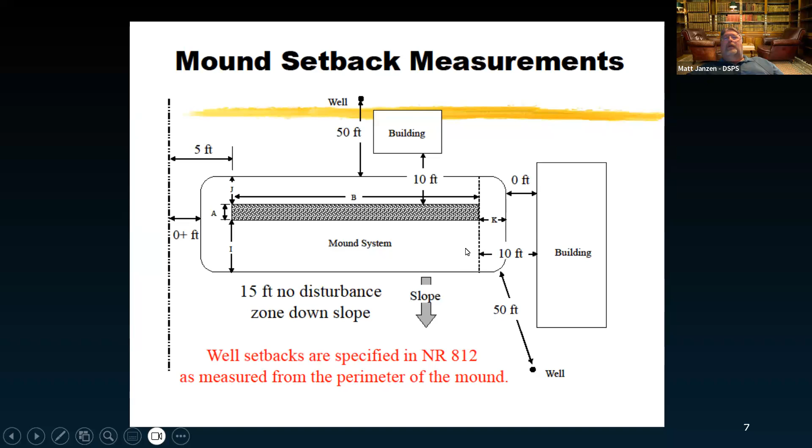The next section I want to talk about is a general plumbing update. You may be asking, well, we're in POWTS, why do we care about general plumbing? Well, we reference 381 through the whole suite of the plumbing code, 381, 382, 384 are the bulk of it. If there's any changes there, they may affect us in the POWTS program, so it's important to understand what's going on. I've gone through and found the ones most likely to affect us, so I think I got them all, but maybe there's something out there I'm not aware of.

A few things I want to point out: restricted service licenses. This is what the old code used to say - restricted service master plumbers and journeymen could do POWTS systems, building sewers, and private interceptor mains. We know we could do the building sewer from the building out to the septic system. Typically general plumbing is everything up to the septic tank, but it allows restricted service people to do that. Also water services, private water mains under 381, and a portion of the drain or water supply that connects building sewer to the connection provided for mobile or manufactured homes. So that's what it previously allowed.

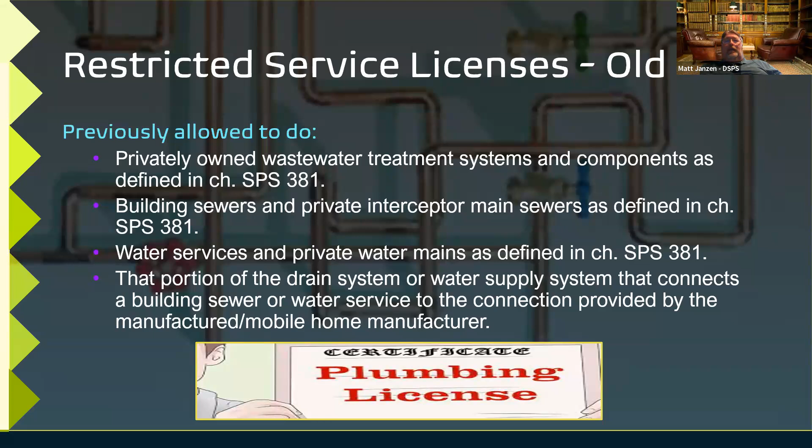There's been some expansion of that. We still have the same privately owned wastewater treatment system components - POWTS, building sewers, sanitary building sewers, and storm building sewers. Now it adds that you can do it from the street main to immediately inside the proposed foundation or wall of the building. So it doesn't have to be a building sewer connected to a POWTS - you could also do any building sewer, including storm. Also water services, private water mains, manufactured home community water supply systems, and campground or recreational park water supply systems. So it's expanded a bit.

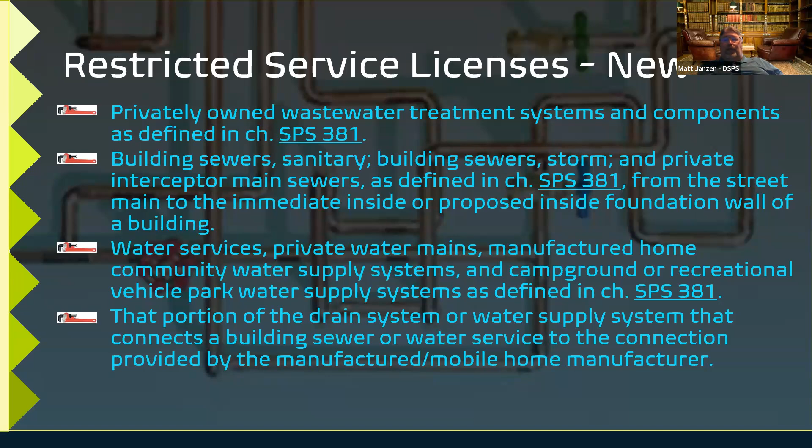Same as before, you can do the portion of drain or water supply systems through a mobile home - that's unchanged. But you can also now do manufactured home or mobile home community drain systems, sanitary drain systems, and storm systems, plus campground and recreational park drain systems or storm systems. So it added storm into a lot of that.

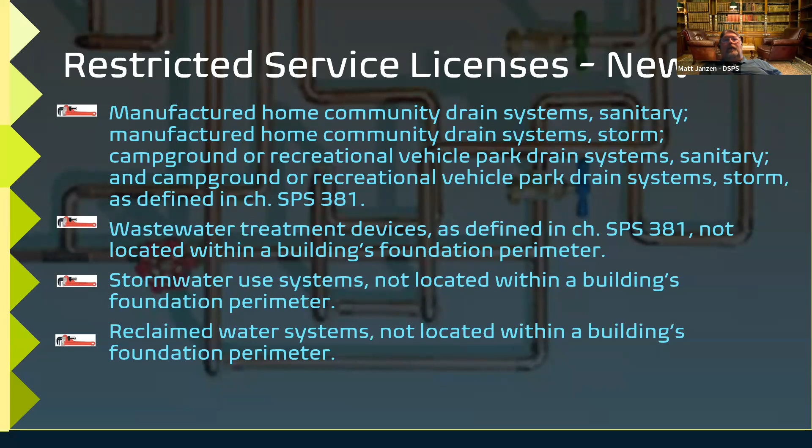It also allows those restricted licenses to do wastewater treatment devices, as long as they're not located within a building's foundation perimeter. So you might have a wastewater treatment device and then it goes back into the building - you'd be able to do those. Also stormwater use systems and reclaimed water systems, if it's something outside a building perimeter. You wouldn't be able to do one inside, but if they pipe it outside, it goes through some kind of reuse, reclaiming, or treatment, and then back into the building, as a restricted license holder you'd be able to do that kind of work.

So just a little bit of a difference there on what the licensing updates allow you to do. Some other plumbing code changes: SPS 382.21, testing of plumbing systems. Except as provided, all new plumbing and all parts of existing systems that have been altered, extended, or repaired shall be tested and inspected as specified. This adds language that it has to be inspected. Previously, a plumber could just test it and say it's good to go. Now it says it has to be inspected, so be aware that if you're doing some of these things, it requires an inspection.

The other thing that's also been extended to the counties is that now with building sewers, it requires them to be inspected.

So we should be noting that if you're looking at that stuff, note that you inspected it, or if you did not, note that you did not inspect these things, because where general plumbing and POWTS take over, we just want to make sure you note what you inspected and what you didn't, because we don't want somebody coming by saying the county was out there and looked at that, and you say no, that was a stormwater or water reuse system, that's not my purview, I did not inspect that part of it. So make sure from the county's end that you're noting what you inspected and what you did not, and from the plumber's end, if the county's not looking at it, make sure you contact UDC or general plumbing and get it inspected, because it's required to be inspected.

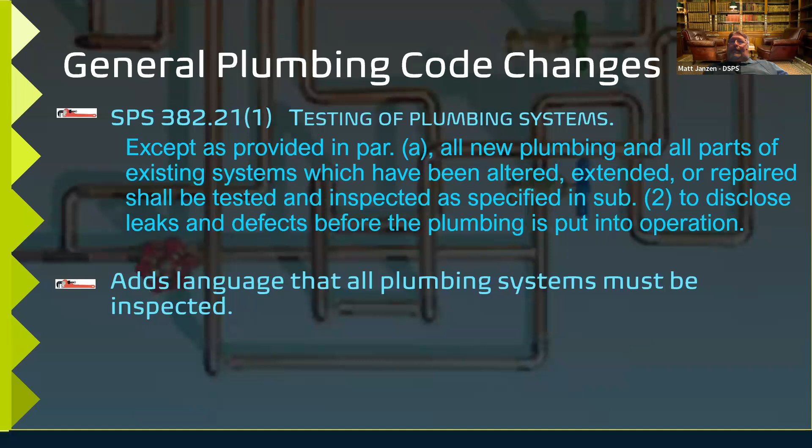So the next section here, SPS 382.34, paragraph 5, paragraph B2, private on-site wastewater systems. It says all new, altered, or remodeled plumbing systems that discharge to a private on-site wastewater treatment system shall be provided with grease interceptors of sufficient capacity to ensure compliance with 383.44 paragraph 2. So what this does is the language change removes the requirement to have an exterior grease interceptor.

So you can now use an interior grease interceptor. But the catch is the way the language is worded, it says if you have a grease interceptor, it must meet the requirements of SPS 383.44 paragraph 2, which is, I don't have the whole thing here, but it's basically that we have to meet the domestic wastewater strength. The way that's been interpreted is they had all the parameters in there. General Plumbing is interpreting that to mean only that it has to meet the grease, the FOG standard.

So the way it's worded and stated now is, and we're still working this out with General Plumbing, and General Plumbing is coming up with guidelines, but it appears that if you have a grease interceptor connected to a POWTS, the waste coming out of that grease interceptor must meet the standard of 30 FOG. We're still working with General Plumbing on whether they're going to require testing requirements for that. That's what it appears, that they're going to require testing to see that it meets that standard if it's going to a POWTS. So just want you to be aware there is a change there - they can have an interior instead of exterior, but there is a requirement that it meets the 383.44 paragraph 2 parameters for wastewater.

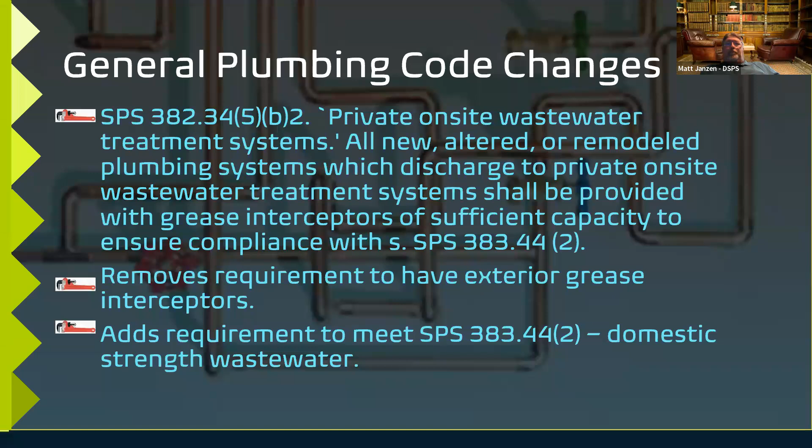Also, with grease traps or grease interceptors, 382.345C1G says any new or replacement exterior grease interceptor shall have at least 2 compartments. So now grease traps or grease interceptors can't just be a single tank; they have to have at least 2 compartments. There are also some requirements under that section that add specific tank specifications, such as where manholes have to be, how close to the inlet and outlet, sizing, and location of different parts of that tank. So be aware if you are adding one in, there's a bit of change there. The manufacturer should be up on what those changes are, but just be aware there are some changes to the geometry of the tanks besides having a 2-compartment tank for a grease interceptor.

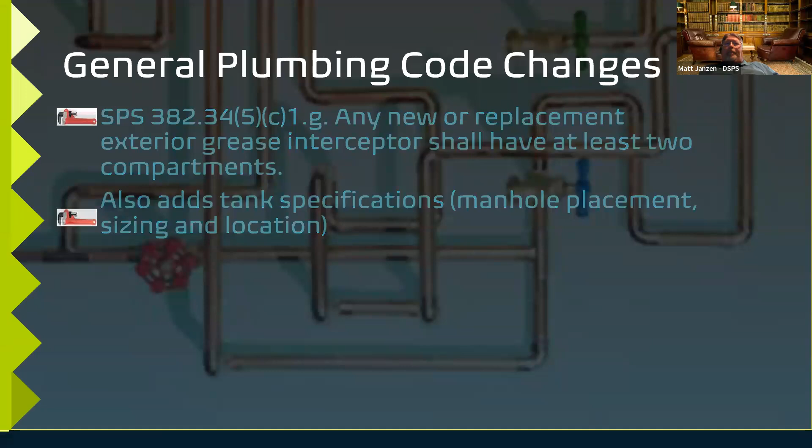383.71 Department Procedures - some people had questions about why this was removed. This is the previous paragraph: the department shall support a performance monitoring program from Wisconsin fund allocations and program revenue funds generated from POWTS plan review and sanitary permits. That was removed out of the code. Some people are concerned that this means no performance monitoring will be done and it's gone, but it doesn't remove the rest of the section.

It just removes where the funding comes from, allowing the funding to come from any place. This past budget, there wasn't money allocated, but we tried to get a line item to say we want a special allotment for performance monitoring that's not tied to Wisconsin Fund or program revenue. We want a separate line item. This gives us the flexibility to get funding from any source, not specifically out of Wisconsin Fund or plan review or sanitary permits. It doesn't remove the whole performance monitoring section from the code, just removes where the funding has to come from, so it gives us more flexibility, not less.

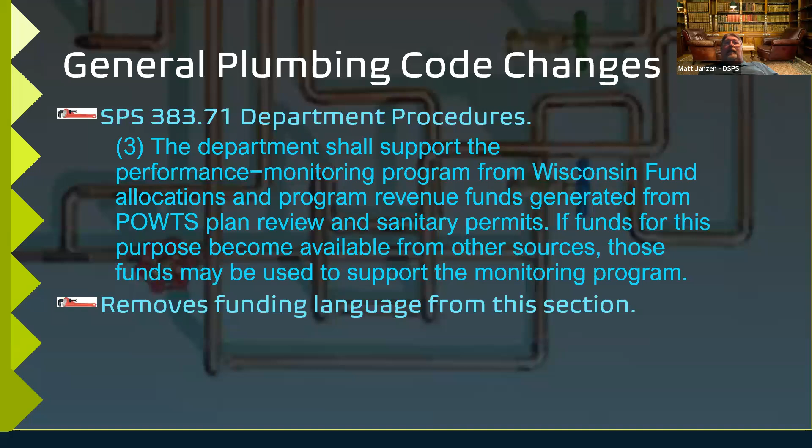Wanted to mention complaints. This summer we've dealt with some issues on complaints. It's not just a licensing issue, like a plumber or soil tester doing something wrong. Counties can turn it in, or a competitor if you know someone's out there without a license. It's not just licensing issues - it's putting systems in without permits or without a license, or hiring unlicensed people or contracting with them.

For us to investigate a complaint, we have to have a complaint to start with. We all sort of know this guy doesn't do stuff right, or this product doesn't work, but until we get complaints, we don't know that for sure, and there's nothing we can investigate.

It's also important to develop a track record. We've had cases where we finally got a complaint turned in, from a county or a private individual, and for us that's the first time we've heard about it. You may have dealt with it individually multiple times, but to us it's just the first case. So it's important to develop a track record.

Turn the complaints in. We can build a case of somebody abusing their license, or unlicensed people, or product issues - it's just as important to track bad products. If you keep ordering a product from a company and getting failures, or they're falling apart, or not living up to expectations, you can turn a complaint in and we can track that and investigate those product issues or license issues. Without complaints coming in, we don't develop a track record, and we're never able to initiate an investigation.

So just as a reminder, there are some things that have changed in the GeoMat component manual and some things that have not. These are some of the things we see as being overlooked sometimes in the GeoMat in-ground component manual, so it would be valuable to go through a few reminders on that.

As with all of the component manuals, there is that 4.5 gallons per foot per day limited linear loading rate for soils that have a less than or equal to 0.3 gallons per day square feet. When Josh went through and redid the approval for this, he added a note saying that this is separate from the downsizing credit and takes priority on any design, regardless of what product is used. So in general, the GeoMat component manuals can go up to 10 gallons per foot per day, but if you're on limited soils, that linear loading rate restriction still applies. It's important to keep in mind when doing your design that regardless of effluent rating or whatever, that requirement is still there.

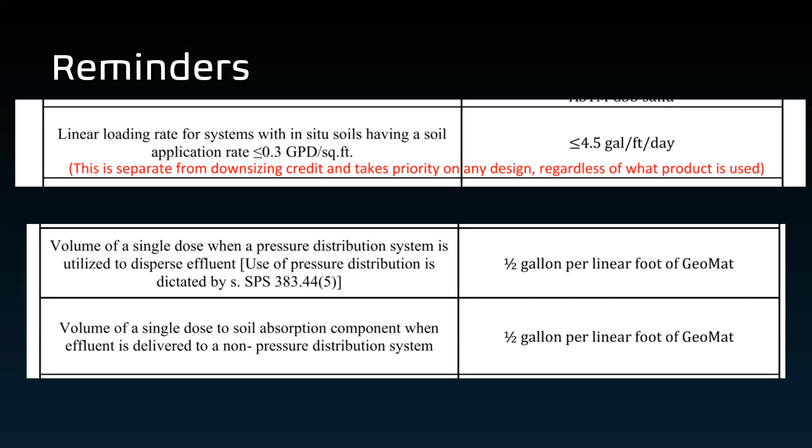Additionally, something we see come up occasionally - and I'm sure counties see it a lot more often since we don't do that many in-ground plan reviews - is this requirement unique to the GeoMat in-ground component manual regarding the volume of a single dose. These two things on the screen are unique to the GeoMat in-ground component manual: the volume of a single dose for a pressure distribution system or a non-pressure dosed system is limited to a 1/2 gallon per linear foot of GeoMat flat. That is the dose volume it must be - there's no window like there is with the pressure component manual.

An additional reminder, important for later, is the GeoMat component height. The GeoMat component itself includes that 12 inches of ASTM C33 sand, which will be important with the changes coming up in the next couple of slides. The max burial depth of GeoMats is 42 inches, so that's important to keep in mind too, especially on sites with some slope to the surface - 2, 3, 4% - make sure that at the deepest it's no deeper than 42 inches buried.

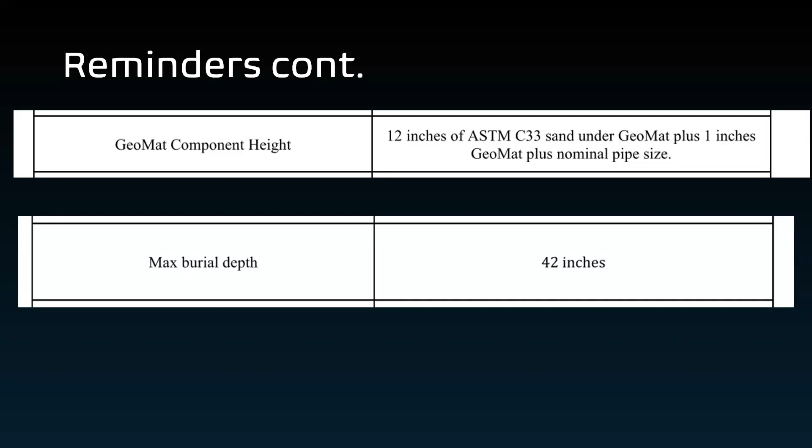These are the changes made to the GeoMat in-ground component manual, mostly clarifications that came about from questions requested by inspectors and installers. In the previous version, there was a lot of confusion because it wasn't clear about how many filters are required and what kind they need to be. So a clarification was added regarding filters, saying only one is required - you can use more if you choose, maybe better - but for gravity systems, a septic tank effluent filter shall be used, a regular gravity filter. If there's a dose or pressure distribution system with a pump, a pressure filter shall be used. You could use a gravity filter as well if you wanted, but only one is required.

In addition to that, there was also a change made regarding the location, vertically within the system, of where these observation pipes should be located.

It was unclear in the previous version of the component manual, so hopefully the changes that have been made will make it more clear. The current version states that the location of the observation pipes shall be at the infiltrative surface at each end of the cell, meaning below the 12 inches of component sand.

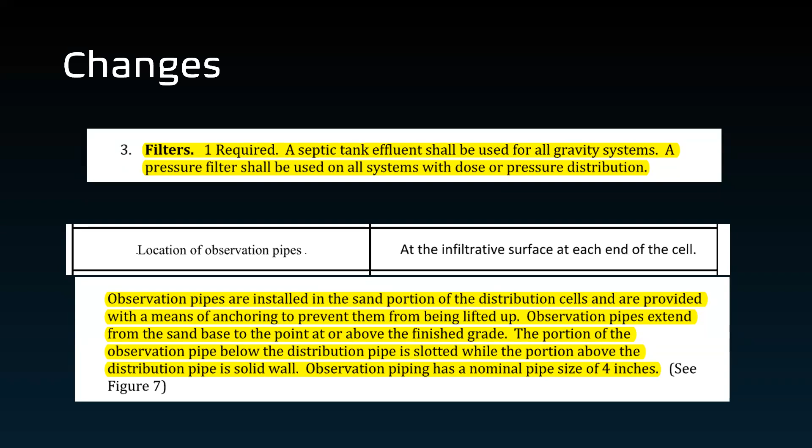The system has to be vented somewhere, and maybe we'll talk about that later, Matt, regarding venting of a system. Yeah, I don't have that as today's topic for a presentation, but we can do that for next chat and talk about venting requirements. Thanks, Eric.

Okay, some other things I wanted to mention here: winter soil testing, the time's coming up for that. Department field verifications are dependent on weather conditions, so just be aware. If the weather isn't good, we won't be out doing on-sites.

That also is now playing into things such as interpretatives. If you have stuff that's submitted, you may have been out there in August and done it, but by the time it comes in, based on our workload, if we can't get to it and the weather turns, we may not be able to evaluate it until springtime. So just be aware of that.

Also, under section 385.20 paragraph 4A, soil color evaluation shall be performed on days when light conditions permit accurate color determinations. We used to have actual times and dates when you could do winter soil testing. We don't have that in the code anymore, but obviously if you have poor light conditions or it's late in the day when the sun's low, we're going to have a hard time seeing colors.

It may be hard for you to evaluate. I've seen many soil tests done in the winter, and then you come back in the spring or summer to put it in, and it's like, whoa, what are these things out here? We see redox all over it, and they just weren't able to see them in the wintertime. So be careful, be aware of that.

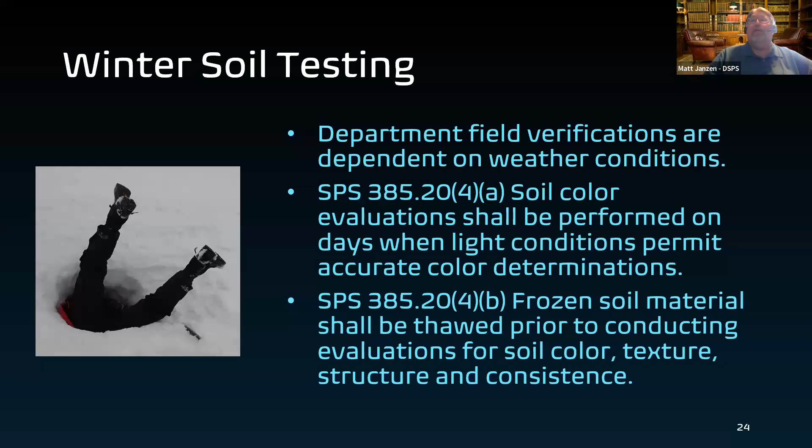Just like exposing a pit for a long period of time can oxidize things, driving the moisture out with a fire can also change some soil characteristics, so just be aware of that. And then for winter construction, frozen soil: POWTS treatment dispersal components can't be installed if the soil is frozen at or below the infiltrative surface. So once stuff freezes up, we can't continue working on those systems.

And then also snow cover—if we do have a light snow or something like that, we have to try to remove the snow cover before excavating or installing a POWTS treatment dispersal component. So not to say you couldn't do a conventional system in the winter if you can get through the frost, but we've got to remove the snow. We don't want that falling into where we're excavating or digging in.

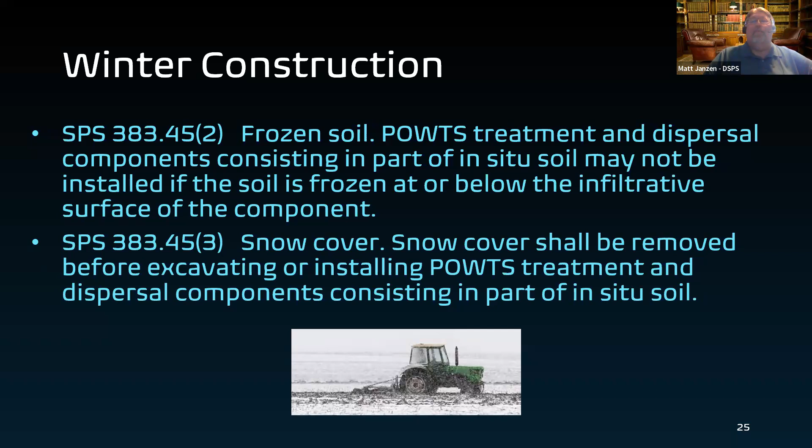Some other kinds of questions have popped up here. Chicken processing had an owner that wants, or I think it was needed or required as part of their licensing, a connected facility that processes chickens. Well, what's required?

Well, the bathroom is domestic wastewater, can be handled in the usual manner. It seems silly maybe to put a system in for one employee, because that's what it was. 13 gallons a day, sized up 150%, 20 gallons a day. Possibly ridiculous to do that.

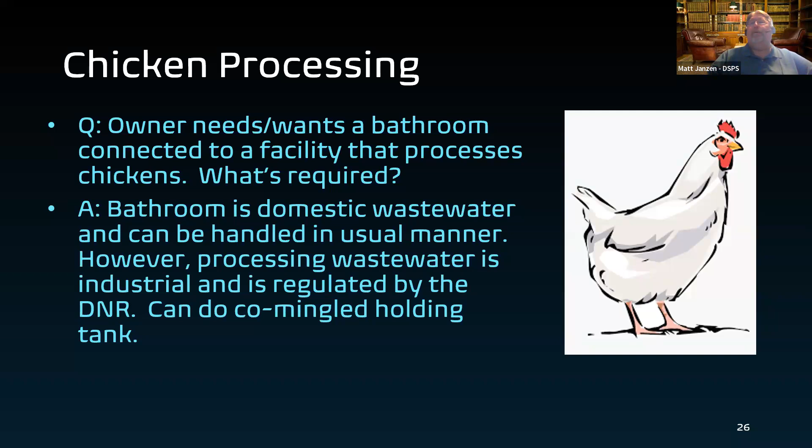So the processing wastewater for the chicken processing, that's an industrial wastewater regulated by the DNR, but most likely in this case, you'd probably do a commingled holding tank or something like that, put the wastewater in there. So again, make sure whether it's domestic or industrial wastewater, but there is a possibility to commingle those with DNR approval.

Previously filled site had an owner who wants to proceed with a site that was filled back in 2007 with ASTM C33 sand. So what do they need to do now? Just like any site containing fill in the treatment area, it will be an individual site design, but then also it's most likely going to require a visit by the DSPS field person.

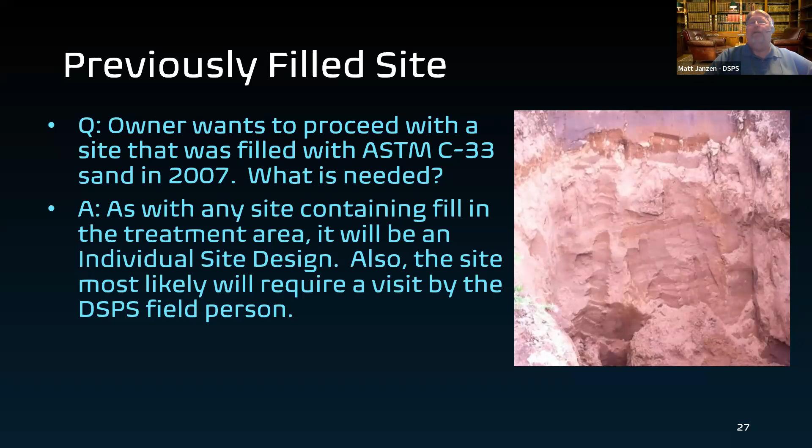So even if it was filled with ASTM C33 sand, we still want to go out there to see what it looks like today. Did the site get further manipulated? Was there some erosion on the site? Plants or trees or something caused an issue, or maybe the water raised up into that sand. We'd still want to have it evaluated and looked at.

Mass loading had a question about doing some mass loading. This is an individual site design, but if a site requires 1,200 square feet based on domestic strength wastewater, how much would be required based on a mass loading?

So basically what we're doing is instead of loading it according to the parameters in the code—220 BOD, 150 TSS, 30 FOG—if we have something higher than that, could we load it based on mass loading instead of the tables assigned in the code, 0.6 gallons or 0.7 gallons, or 0.3, or whatever the soil type would say?

Well, you can, but it depends on the strength of that wastewater. So for instance, if the wastewater is twice as strong, so 440 milligrams per liter BOD, that's twice the 220, then the area would be required to be larger. So whatever you figured out, the gallons per day based on the soil loading rate for domestic strength, if the wastewater is twice as strong, you need twice as much area.

But be aware that not only do you have to account for BOD, but you have to account for TSS, you have to account for FOG. So each one of those may have multipliers. So basically, if you get a little bit over, you probably could do that, but if you get much over—especially FOG, which is much harder to treat, fats oils and greases are about 8 times more difficult—you might need a system, even at 40 FOG, that's huge in order to treat something like that.

Time dosing had a question. Does a time dose system need tank reserve capacity above the alarm, or does the surge or working volume suffice?

The answer is yes, unless designed with a duplex pump, a reserve capacity of 1 day estimated flow needs to be included in there. And that's basically to allow time to fix an issue if the pump doesn't activate.

So if we have our working capacity where the pump kicks on, but it will only dose every so often, and then if it finally gets so full the alarm kicks on—well, the problem is if we don't have any capacity, then the alarm kicks on and pretty soon we'll be overflowing the tank. So you need to have that 1 day reserve capacity above the alarm, or a duplex system that would kick in.

The alarm would go off saying, hey, we've got to run the duplex, and that's our problem now. But at least we'd have that other pump being able to run and take care of it.

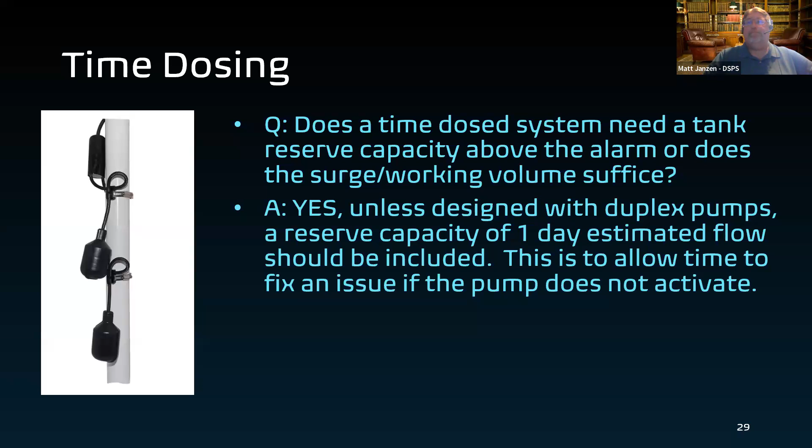Sanitary permits. Question is, can a county hold a sanitary permit for reasons other than POWTS? So for instance, they got a zoning violation, or they're digging in a wetland or something like that.

The answer is no. Wisconsin statute 145.19(1m) in part says the governmental unit shall approve or disapprove the sanitary permit according to the rules promulgated by the department under this chapter. So a sanitary permit can only be evaluated according to sanitary rules.

Now, I've had some cases where the county says we don't want to issue this permit because they don't meet the zoning, they can never build. You can notify them of that and tell them, hey, we're going to issue the sanitary permit, but you're never going to build out there because you don't meet the zoning requirements, or it's an outlot and it's restricted, or it's too small, it's a substandard lot, you can't put a building on it.

And that may be the case. Some people think if I get a sanitary permit, that's going to give me more leverage to get something down the road. Whether it is or not, it doesn't matter for us. We can only evaluate according to sanitary rules.

And that's further backed up in 383. It says, upon review of the application and supporting information, the governmental unit or the department determines the proposed design, installation, and management of the existing POWTS or new POWTS. If it conforms with the chapter, then you have to issue the permit.

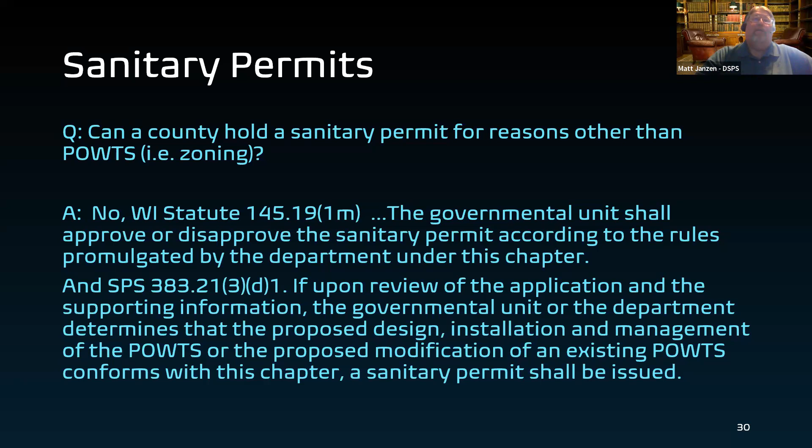County maintenance program. Question was, can a county require a certain format or information when reporting maintenance events? And yeah.

383.255(2)(b) establishes, at a minimum, the POWTS maintenance program shall consist of the following elements, and it lists what those are. But it's a minimum, so the counties can add other things in that they want to require as part of a maintenance program. So this is one of the parts of the code that it's not uniform. We do give the counties a little latitude to require that.

It also states further in 383.255 that a process that accepts and records - it doesn't state what that process is. A lot of counties send out a card. Some counties now are going to an electronic form that you have to enter on an electronic format or go into their system and download things. So the county can say how, when, where, and what they want reported as part of that maintenance program. So we do give the counties latitude to manage that.

But that's what I have for this month's POWTS chat. Give you sort of a wide range. I know you guys want some other stuff in there. We'll try to write that down, remember that for next time. Again, a lot of stuff happens in the POWTS program. We can only cover so much in an hour, but it's our chance to reach out to you and get you some information and let you interact with us a little bit.